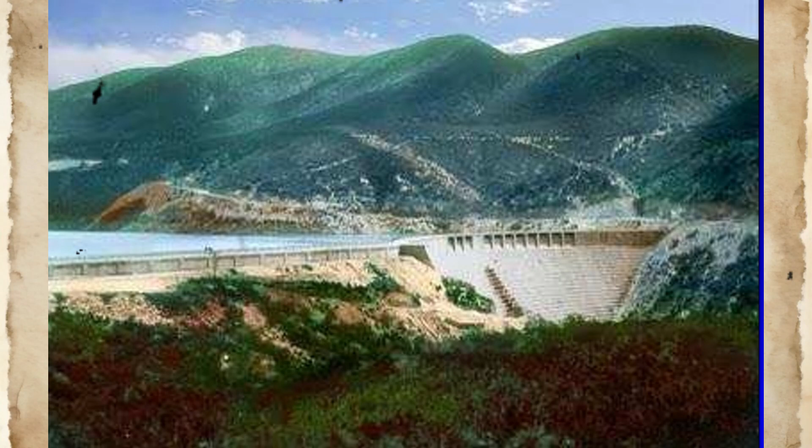The St. Francis Dam was conceived and executed within a specific institutional and technical context that shaped every subsequent decision. Between 1905 and 1913, the city of Los Angeles had constructed the Los Angeles Aqueduct, a 375-kilometer conveyance system designed to transport approximately 12 cubic meters per second of water from the Owens River drainage on the eastern slopes of the Sierra Nevada to the San Fernando Valley.

This system was designed, constructed, and administered by the Los Angeles Bureau of Waterworks and Aqueduct under the direction of William Mulholland, who served as chief engineer. Mulholland had begun his career in 1877 as a laborer maintaining water distribution canals and had risen through the organization without formal engineering education, relying instead on direct observation, technical reading, and accumulated operational experience. By 1924, Mulholland was recognized as the principal architect of Los Angeles's water infrastructure and wielded substantial autonomy in project conception, site selection, and design approval.

The St. Francis Dam was authorized as a storage facility to provide operational flexibility in the aqueduct system and to serve as a reserve supply during periods of peak demand or reduced inflow. The site selected was located in San Francisquito Canyon, a tributary valley to the Santa Clara River, approximately 64 kilometers northwest of downtown Los Angeles and 80 kilometers from the primary Van Norman Reservoir complex in the northern suburbs.

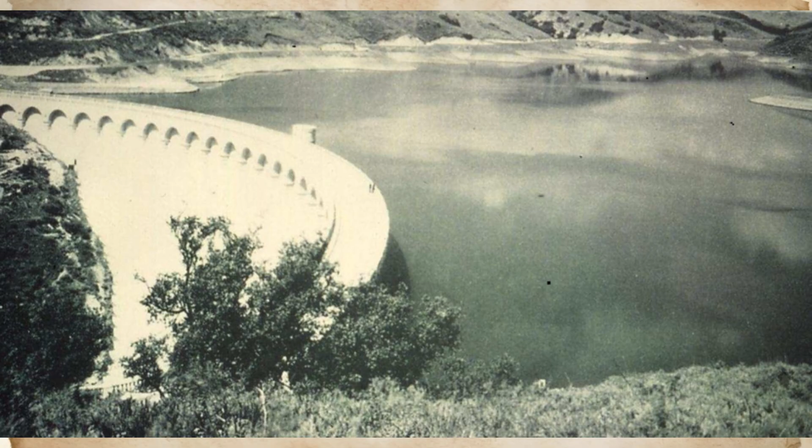Modern understanding of uplift pressure in dam foundations recognizes that hydrostatic pressure from an impounded reservoir can be transmitted through interconnected fractures, bedding planes, and cleavage surfaces in foundation rock, creating an upward force that reduces the effective weight of the dam and thereby reduces resistance to sliding and overturning.

By 1912, published literature on dam design had documented this phenomenon and had identified foundation drainage as a critical safeguard. The failure of the Austin Dam in Pennsylvania in 1911 had been attributed in part to inadequate control of uplift pressure. These precedents were apparently not incorporated into the design approach adopted for the St. Francis Dam.

The geology of the dam site was characterized by the presence of two distinct lithologic units. The western abutment and foundation consisted of the Vasquez conglomerate, a Paleogene sedimentary formation composed of poorly cemented cobbles and boulders in a matrix of clay-rich sand and silt. The eastern abutment and a portion of the central foundation consisted of the Pelona schist, a Cretaceous metamorphic rock characterized by well-developed foliation and pervasive micaceous mineralogy.

These two units were juxtaposed along the San Francisquito Fault, a northeast trending structure whose surface trace passed directly through the dam site beneath the western portion of the dam. The fault was marked by a zone of gouge and brecciated rock more than 1 meter wide, flanked by zones of intensely fractured and veined material.

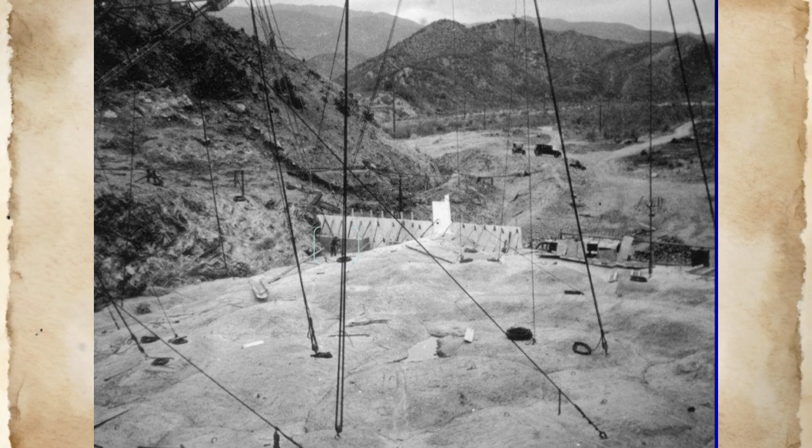The placement of a large concrete structure at the base of the slope, combined with saturation of foundation rock and introduction of hydrostatic pressure from an adjacent reservoir, constituted precisely such an alteration. The potential for reactivation of these latent slip surfaces was not evaluated prior to construction, as no detailed geological investigation of the site was conducted.

The design philosophy that guided construction of the St. Francis Dam was one of empirical precedent and conservative proportioning rather than rigorous analytical calculation. Mulholland and his design staff did not perform detailed stress analyses of the dam cross-section, load distribution on the foundation, or stability calculations incorporating realistic material properties and loading conditions.

The dam's geometry was instead based on visual similarity to the Hollywood Dam, adjusted for the greater height required at the St. Francis site. This approach was not unusual for the period, particularly for relatively small dams constructed under the authority of municipal agencies. However, it presupposed that site conditions at St. Francis would be comparable to those at Hollywood, an assumption that was not verified.

The absence of formal design calculations meant that there was no quantitative basis for assessing the adequacy of the dam's proportions, the significance of the height increase implemented during construction, or the sensitivity of stability margins to variations in foundation properties, uplift pressure, or material strength.

The institutional context in which the St. Francis Dam was designed and constructed was characterized by minimal external oversight. At the time of construction, California law exempted municipal water agencies from state-level review of dam design and construction. The Division of Water Rights, the state agency responsible for dam safety, had no jurisdiction over projects undertaken by cities

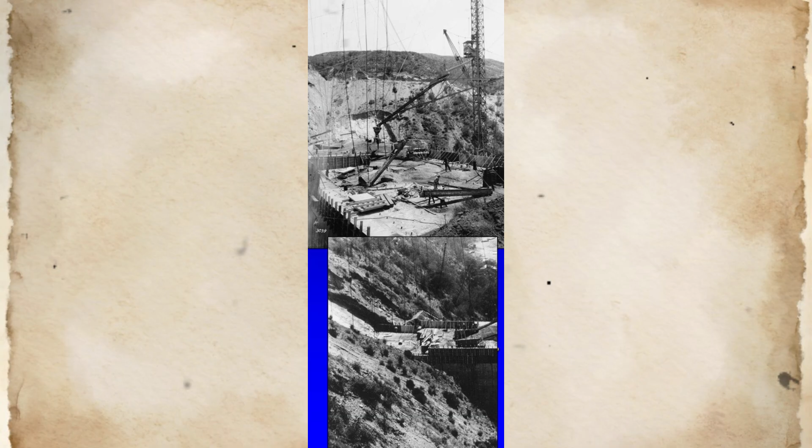or special districts. Consequently, the St. Francis Dam was not subject to independent technical review by engineers or geologists outside the Los Angeles Bureau of Water Works and Aqueduct. There was no requirement for formal design documentation, no mandate for geological investigation, and no mechanism for third-party verification of construction quality or conformance to design intent.

Mulholland's authority within the Bureau was effectively absolute. The Board of Commissioners that governed the agency consisted of appointed officials with no technical training, who deferred to Mulholland's judgment on all engineering matters. This concentration of authority in a single individual, operating without formal accountability or technical review, created conditions in which judgments based on incomplete information, untested assumptions, or personal confidence could be implemented without challenge.

The operating philosophy for the reservoir once construction was complete was similarly informal. Responsibility for monitoring the dam's condition was assigned to a resident dam keeper, whose duties included visual inspection of the structure and observation of seepage flows. No formal inspection protocol was established, no quantitative criteria were defined for evaluating observed conditions, and no escalation procedure existed for anomalies that might warrant further investigation.

The assumption was that any significant distress in the dam or foundation would manifest as visually obvious cracking, deformation, or leakage that would be self-evident to an attentive observer. This assumption rested on the expectation that the dam and foundation would behave in a predictable manner consistent with the designer's conceptual model of the structure. It did not account for the possibility that observed conditions, such as seepage flows, minor cracking, or localized settlement, might be symptomatic of progressive failure mechanisms not anticipated in that conceptual model.

Reservoir filling commenced in March 1926, when aqueduct water was first diverted into the reservoir basin. The reservoir level rose gradually as water accumulated, with interruptions corresponding to periods of reduced aqueduct flow or increased downstream demand. During this period, vertical shrinkage cracks developed in the downstream face of the dam. Such cracks are common in mass concrete gravity dams, resulting from thermal contraction as the interior of the concrete mass cools following hydration of cement.

These cracks typically extend from the exposed surface into the dam, propagating along planes of least tensile resistance. In an unreinforced monolithic structure like the St. Francis Dam, such cracks would be expected to develop along approximately radial and vertical planes in the central valley section, and along inclined radial planes in the abutment sections. The presence of these cracks was noted during routine inspections, but was not regarded as indicative of structural distress. This interpretation was consistent with contemporary understanding of mass concrete behavior and was not unreasonable given the limited information available.

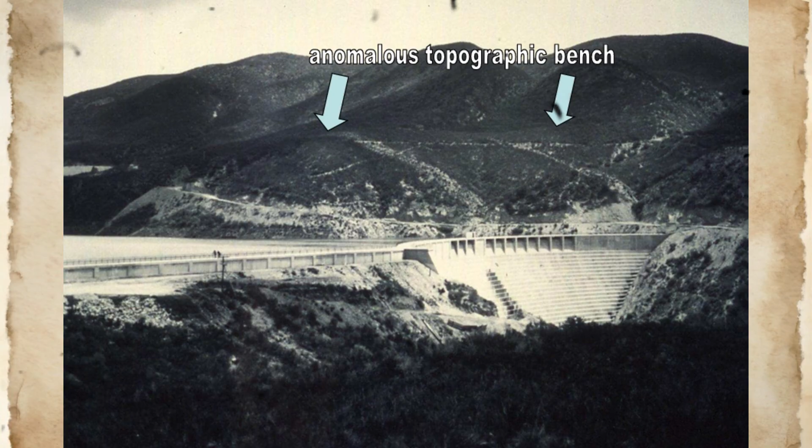By April 1926, the reservoir level had risen to the elevation of the fault trace where it crossed the foundation beneath the dam. Seepage was observed emerging from the western abutment in the vicinity of the fault outcrop. This seepage was attributed to flow through the fault gouge and adjacent fractured rock. The flow rate was estimated as modest and was judged to be within acceptable limits for a structure of this type. No corrective measures were undertaken.

Over the following months, various minor leaks were observed at different locations along the dam's downstream face and abutment contacts. These leaks exhibited variations in flow rate corresponding to changes in reservoir level and to seasonal temperature variations affecting concrete expansion and contraction.

None of the observed leakage flows were regarded as sufficiently anomalous to warrant detailed investigation or remedial action. The interpretation framework applied to these observations was one in which seepage through and beneath dams was expected, provided that flow rates remained stable and no significant erosion or piping was evident.

On March 7, 1928, the reservoir reached spillway elevation for the first time, achieving its maximum design storage capacity of approximately 38,000 acre-feet. In the week preceding this date, inspections had noted an increase in seepage flow from several locations in the western abutment. These flows were turbid, indicating that the percolating water was transporting fine-grained sediment.

Turbid seepage is a potential indicator of internal erosion or piping within the foundation or embankment material, a mechanism that can lead to progressive enlargement of seepage channels and eventual structural failure. However, in the context of the St. Francis Dam, a concrete structure founded on rock rather than an earthfill embankment, turbidity was attributed to surface erosion of weathered rock or soil materials rather than subsurface piping. This interpretation was consistent with the expectation that seepage through rock foundations would follow discrete fractures or bedding planes, rather than developing self-enlarging erosion channels as in soil.

On the morning of March 12, 1928, the dam keeper discovered a new leak in the western abutment, discharging muddy water at an estimated rate of approximately 75 liters per second. He immediately notified Mulholland, who arrived at the site later that morning accompanied by Harvey Van Norman, his assistant. They inspected the leak and observed that the flow exhibited periodic surging, a pattern of alternating higher and lower discharge rather than steady flow.

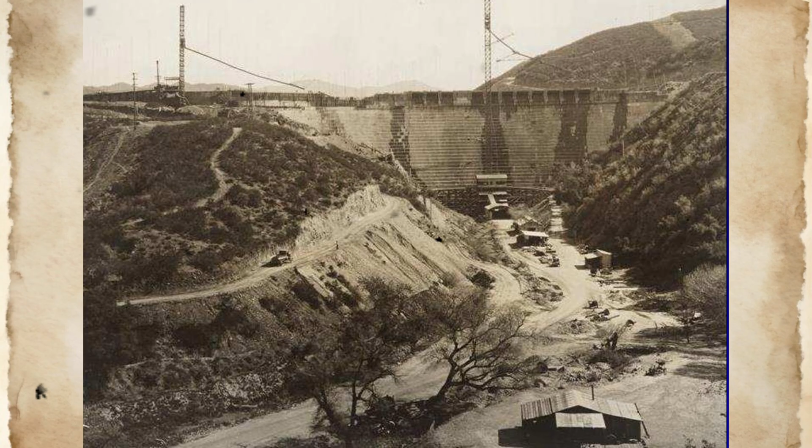The judgment rendered by Mulholland on the morning of March 12 was based on his interpretation of the observed conditions within the framework of his accumulated experience and his conceptual understanding of how the dam and foundation should behave. He had inspected numerous dams and water structures over his career and had developed intuitive criteria for distinguishing normal operational conditions from indicators of distress. The seepage flow observed on March 12, while larger and more turbid than previous flows, did not exceed the bounds of what Mulholland considered plausible for a structure of this type at full reservoir.

The surging of the flow, rather than being interpreted as evidence of subsurface erosion or structural movement, was rationalized as a transient hydraulic phenomenon. This interpretation was not implausible given the information available. However, it was predicated on the assumption that the foundation materials were behaving in a stable and predictable manner, an assumption that was, by that time, no longer valid.

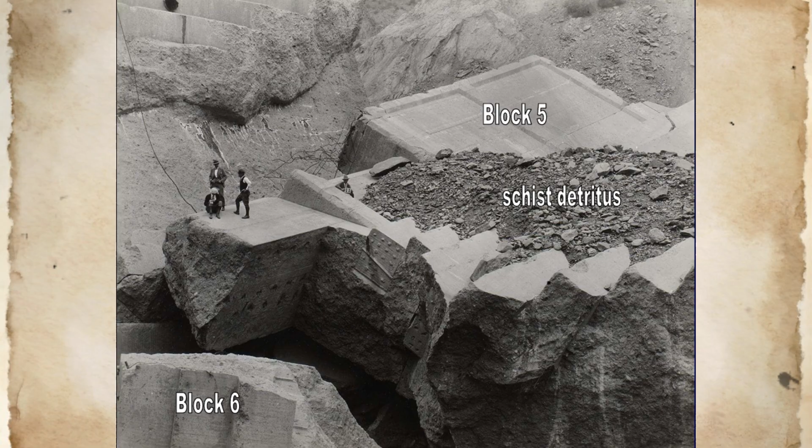At approximately 8:30 p.m. on March 12, a family driving on the canyon road that passed above the eastern abutment of the dam encountered a section of roadway that had subsided approximately 30 centimeters, creating a distinct step across the road width. The road at this location was situated approximately 30 meters upstream of the dam crest, on a slope composed of Pelona schist. The subsidence indicated that a portion of the hillside had moved downward and outward toward the reservoir. This movement was consistent with incipient landsliding along foliation planes within the schist, driven by reduced shear resistance due to elevated pore pressures in the rock mass.

The family did not immediately report the road damage, and news of the incident did not reach dam operating personnel until after the dam had failed. However, the timing of the observed subsidence, approximately 3 hours before the final collapse, indicates that large-scale deformation of the eastern abutment was already underway by early evening on March 12.

The St. Francis Dam failed at 11:57:30 p.m. on March 12, 1928. The precise timing is established by the recorded failure of an electrical transmission line supported on the eastern abutment, which caused a logged interruption at a downstream substation. Within seconds of this initial failure, the dam underwent progressive collapse in which the eastern and western wings of the structure were displaced downstream and destroyed, while a central section of the dam, subsequently termed the tombstone, remained standing. The failure released the entire reservoir volume in a period estimated at 70 minutes, generating a flood wave that propagated downstream through San Francisquito Canyon, into the Santa Clara River Valley, and ultimately to the Pacific Ocean.

The flood caused extensive destruction of infrastructure and agricultural land and resulted in at least 432 confirmed fatalities, with some estimates suggesting a higher toll. The failure of the St. Francis Dam constituted the deadliest civil engineering disaster in 20th century United States history and precipitated immediate scrutiny of the design, construction, and operational practices that had permitted such a catastrophic failure to occur.

The question that must be addressed in any forensic analysis of this failure is not merely what physical processes caused the dam to collapse, but why those processes were not anticipated, why warning signs were not interpreted correctly, and why the design and institutional framework permitted a structure of this type to be constructed and operated at this site.

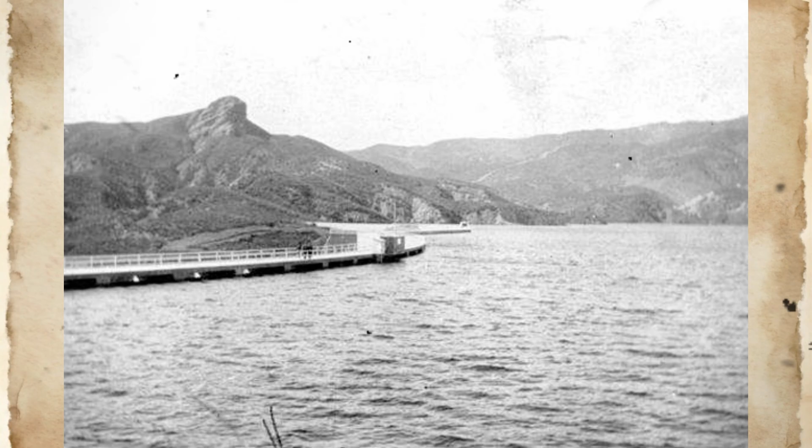Understanding these latent conditions requires examining not only the physical characteristics of the dam and its foundation, but also the cognitive frameworks, institutional norms, and professional practices that shaped how information was gathered, interpreted, and acted upon. The most fundamental latent condition was the absence of comprehensive geological investigation prior to site selection and design.

Standard practice in dam engineering, even in the 1920s, recognized that foundation geology constituted the primary determinant of site suitability, and that surface observations alone were insufficient to characterize subsurface conditions. Exploratory drilling, test pits, and detailed mapping of bedrock lithology, structure, and discontinuities were understood to be essential for evaluating bearing capacity, permeability, and potential failure modes.

However, no such investigation was conducted at the St. Francis site. The decision to construct the dam at this location was based on topographic convenience, the presence of a natural valley constriction suitable for a dam, proximity to the aqueduct alignment, and absence of existing development that would require land acquisition or relocation. Geological suitability was assessed only through visual inspection of surface exposures during site clearing operations.

This approach reflected a broader pattern in Mulholland's professional practice. His career had been built on pragmatic problem-solving and empirical judgment rather than formal analytical methods. He had successfully designed and constructed the Los Angeles Aqueduct, a project of considerable technical complexity, without formal engineering education and without reliance on outside consultants. This success reinforced a belief that direct observation, accumulated experience, and sound practical judgment were sufficient for making engineering decisions.

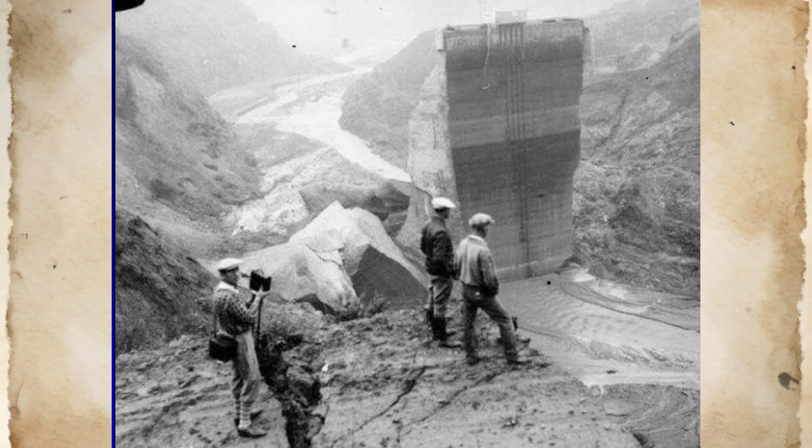A 1911 report prepared by the Bureau's own staff during route selection for the Los Angeles Aqueduct had explicitly identified the Pelona schist along the eastern wall of San Francisquito Canyon as unstable fractured material that should be avoided. This report was filed within the Bureau's records, but was apparently not consulted when the dam site was selected 13 years later. The omission is significant not because the earlier report specifically addressed the dam site, it did not, but because it demonstrates that relevant geological information existed within the organization's institutional memory and was not retrieved or applied when needed.

The presence of the San Francisquito Fault beneath the dam site was similarly documented in publicly available geological maps but was not incorporated into site evaluation. The fault had been mapped by the United States Geological Survey and was shown on regional geological compilations available prior to 1924.

Consultation of these maps during site selection would have revealed the fault's presence and should have prompted further investigation of fault zone characteristics, potential for seismic activity, and implications for foundation, permeability, and stability. However, geological maps were not routinely consulted by civil engineers in municipal water agencies during this period, particularly when those engineers lacked formal training in geology.

The conceptual framework within which Mulholland operated did not include geological structure as a primary design consideration. His focus was on topography, hydraulics, and concrete proportioning, domains in which he had extensive practical knowledge. Geology was regarded as a secondary concern, relevant primarily to the extent that obviously unsuitable materials such as loose soil or heavily weathered rock could be identified and excavated.

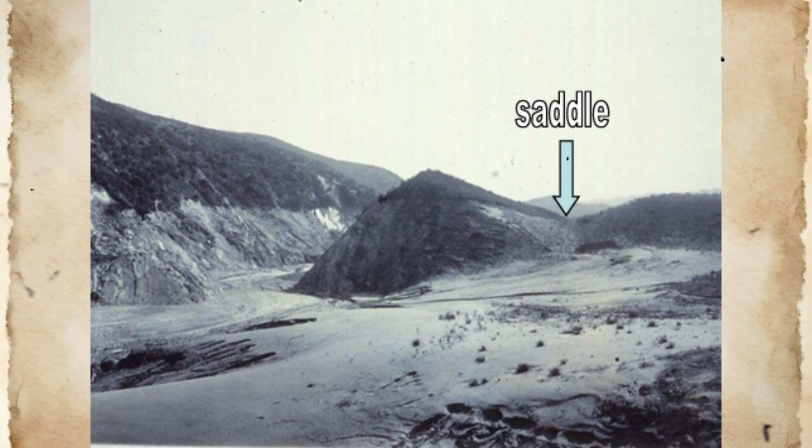The mechanical properties of the Vasquez conglomerate were such that the material could not sustain the compressive stresses imposed by the dam under reservoir loading without undergoing progressive deformation. Laboratory testing conducted after the failure established that the conglomerate's unconfined compressive strength in a saturated state was less than 2 megapascals. By comparison, the bearing stress beneath the upstream heel of the dam, where the full hydrostatic pressure of 93 meters of water head acted on the foundation, would have been approximately 1.5 megapascals in the vertical direction alone.

When the inclined components of stress, due to the dam's geometry, and the lateral thrust from arch action are included, the total stress magnitude in the foundation approached or exceeded the material's strength capacity. Progressive yielding of the conglomerate beneath the dam would produce differential settlement, with greatest deformation occurring where stresses were highest, specifically in the upper portions of the western abutment, where the dam was tallest and where the conglomerate thickness was greatest. This differential settlement would induce additional stresses in the dam structure itself.

A monolithic concrete dam founded on yielding material experiences internal tensile stresses as different portions of the structure settle by different amounts. These tensile stresses would be concentrated in regions where settlement gradients were steepest, typically at the boundaries between competent and incompetent foundation materials or at geometric discontinuities in the structure. In the case of the St. Francis Dam, such boundaries existed at the contact between conglomerate and schist near the center of the dam and at the transition between the main dam and the western wing wall.

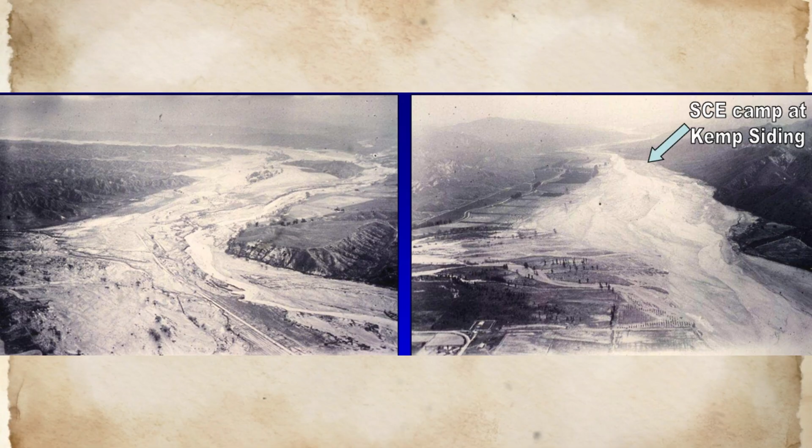In the absence of a deep cut-off wall or grout curtain to impede flow, and in the absence of relief wells or drainage galleries to dissipate pressure, the uplift pressure distribution beneath a dam may approach the full hydrostatic head of the reservoir. The mechanical consequence of uplift pressure is a reduction in the effective weight of the dam, which in turn reduces resistance to sliding and overturning. The factor of safety against sliding, defined as the ratio of resisting forces to driving forces, is directly proportional to the effective normal force acting on the foundation contact. If uplift pressure increases, the effective normal force decreases, and the factor of safety decreases correspondingly.

For the St. Francis Dam, the absence of foundation drainage beneath the eastern and western abutments meant that uplift pressure in these regions could develop to magnitudes comparable to the reservoir head. Mulholland's statement that he considered drainage unnecessary where bedrock appeared homogeneous indicates that he did not recognize the significance of uplift pressure in fractured or foliated rock masses. This judgment was inconsistent with contemporary engineering literature and with the documented experience of other dam failures attributed to uplift.

The eastern abutment presented a distinct set of latent conditions related to the orientation and mechanical properties of the Pelona schist. The schist's foliation dipped toward the canyon at angles between 30 and 50 degrees, creating planes of weakness that were approximately parallel to the slope surface.

The shear strength available along these foliation planes was controlled by friction and by the limited cohesion provided by intact rock bridges between discontinuities. Under natural conditions, with no external loading, and with groundwater levels relatively deep due to the semi-arid climate, the hillside was stable.

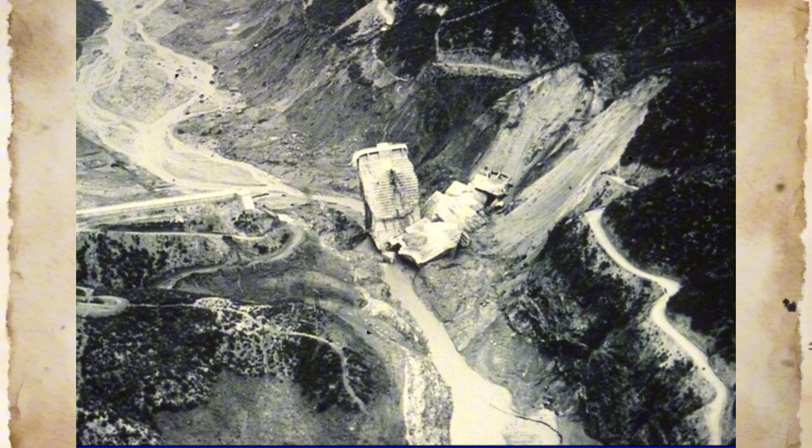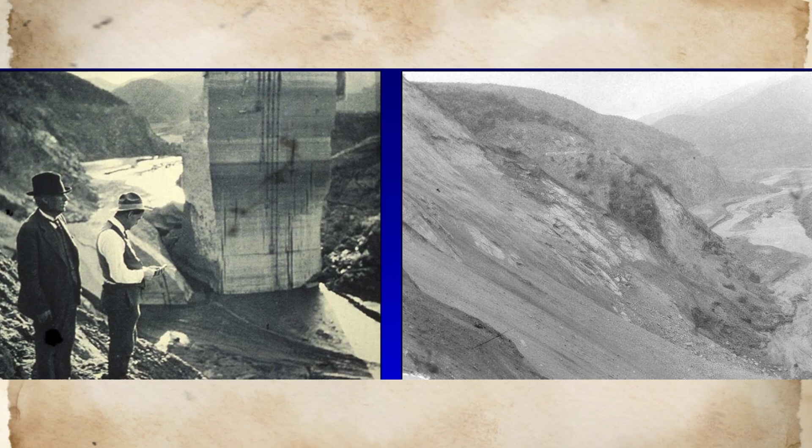The presence of these features was not unique to the St. Francis site. Similar ancient landslides were identified along much of the eastern slope of San Francisquito Canyon during post-failure reconnaissance. However, their presence at the dam site was significant because it indicated that the hillside was inherently susceptible to renewed movement if the factors controlling stability, effective stress, pore pressure, external loading were altered. The placement of a large concrete structure at the toe of the slope, combined with saturation from an adjacent reservoir, constituted precisely such an alteration.

The design of the St. Francis Dam did not incorporate any factor of safety margin to account for uncertainty in material properties, loading conditions, or construction quality. The dam's proportions were based on empirical precedent rather than analytical calculation, and no formal stability analysis was performed to verify adequacy under credible loading scenarios. This absence of quantitative analysis meant that there was no documented basis for the dam's safety margins or lack thereof.

Contemporary practice in dam engineering recognized that factors of safety should be explicitly calculated and should exceed minimum threshold values to account for uncertainties and potential deviations from design assumptions. Typical minimum factors of safety for gravity dams were 2 against sliding and 1.5 against overturning, based on assumed loading conditions that included full reservoir, uplift pressure, and earthquake forces where applicable. Whether the St. Francis Dam met these criteria could not be determined without analysis, and no such analysis was performed.

The increase in dam height implemented during construction further reduced whatever safety margins may have existed in the original design. Raising the crest by 6 meters increased the reservoir storage capacity and the hydrostatic force acting on the dam, but did not increase the dam's base width or otherwise enhance its resistance to sliding or overturning. The effect was to increase the driving forces while leaving the resisting forces unchanged, thereby decreasing the factor of safety. If the original design had been marginally adequate, the modified design would be inadequate. If the original design had included appropriate safety margins, those margins would be partially consumed by the modification.

The decision to increase the dam height without corresponding structural adjustments reflects either an implicit assumption that the original design had been highly conservative, an assumption that could not be verified without calculation, or an insufficient appreciation of how changes in geometry affect structural stability.

Photographic evidence from the construction period, analyzed after the failure, suggested that the actual extent of the dam's downstream toe may have been less than the design dimension. If the concrete pour did not extend to the intended limits, the effective base width of the dam would be reduced, further compromising stability. This discrepancy, if real, would represent a construction deficiency that should have been identified through survey and quality control procedures. However, the Bureau's construction practices during this period did not emphasize formal documentation or independent inspection.

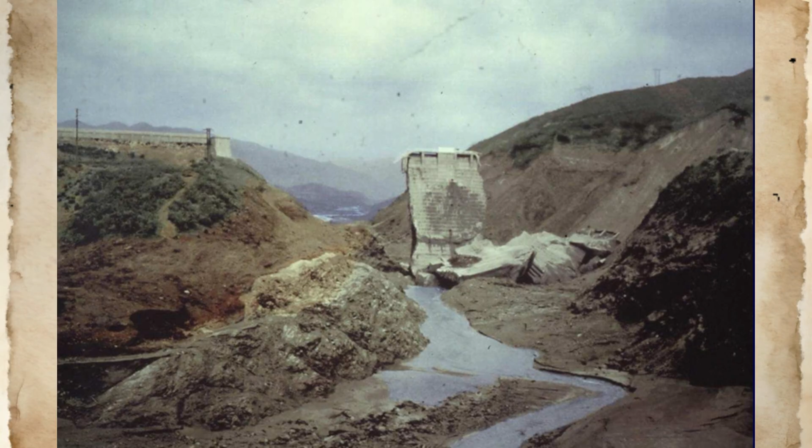Responsibility for verifying conformance to design rested primarily with the resident construction supervisor, who reported directly to Mulholland. There was no independent quality assurance function within the organization and no external oversight by state or federal agencies. Under these conditions, deviations from design could occur without detection or correction.

The dam's monolithic construction without contraction joints or other provisions for accommodating differential movement created a structural system with limited redundancy and no capacity for stress redistribution. In a jointed dam, individual blocks can move slightly relative to one another in response to foundation settlement or thermal expansion, without inducing large tensile stresses in the concrete. Joints also provide known planes of weakness that can accommodate cracking in a controlled manner. In a monolithic dam, all deformations must be absorbed by the concrete itself, and cracks develop along planes of least resistance determined by local stress concentrations, material heterogeneities, and thermal gradients.

Once formed, these cracks cannot close completely even if external loads are removed, because rough crack surfaces interlock and because some irreversible deformation occurs in the surrounding concrete. The result is a structure that, while appearing intact from external observation, consists internally of multiple blocks separated by partial or complete fractures. The mechanical behavior of such a structure under load is fundamentally different from that of a true monolith. But this difference is difficult to quantify without detailed knowledge of crack locations, orientations, and degrees of separation.

The alarm system and monitoring protocols in place at the St. Francis Dam were minimal. The dam keeper was responsible for daily visual inspection of the structure and for noting any unusual conditions such as new cracks, changes in seepage flow, or structural deformation. However, there were no instruments installed to measure concrete strain, foundation movement, seepage quantity, or uplift pressure. The dam keeper had no technical training in structural engineering or dam safety and had no formal criteria for evaluating whether observed conditions were within acceptable limits.

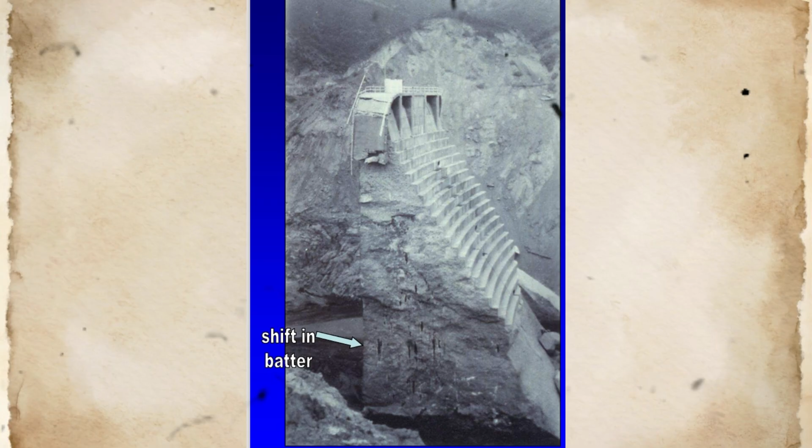This regulatory gap was not unique to California. Similar exemptions existed in other states and reflected a broader assumption that governmental agencies could be trusted to self-regulate. The St. Francis failure demonstrated the fallacy of this assumption and prompted immediate legislative changes to eliminate such exemptions.

The training and professional development of dam operators and inspection personnel during this period did not emphasize recognition of incipient failure modes or interpretation of warning signs. The dam keeper at St.

Francis had operational responsibilities but no formal education in civil engineering, structural mechanics, or dam safety. His understanding of what constituted normal versus abnormal behavior was based on informal guidance from supervisors and on his own observations over time. This knowledge was largely qualitative and comparative. A condition was judged normal if it resembled conditions previously observed, and abnormal if it represented a significant departure. However, this approach provided no framework for recognizing progressive deterioration or for distinguishing between benign variations and indicators of impending failure.

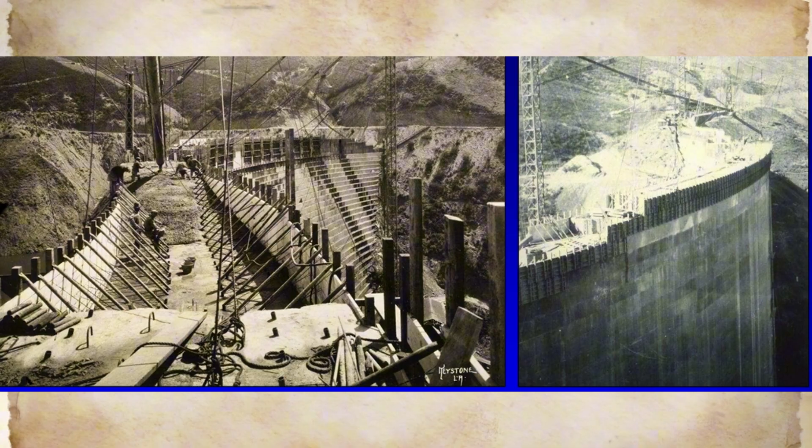The dam keeper's observation of muddy seepage and surging flow on the morning of March 12 was reported to Mulholland, but neither the dam keeper nor Mulholland interpreted these signs as indicators of imminent structural collapse. The interpretive framework available to them did not include a mental model of how subsurface erosion in weak conglomerate or progressive landslide movement in foliated schist might manifest at the surface.

The concept of progressive failure, wherein a structure or foundation gradually loses strength or stability through a sequence of incremental damage events, was not well developed in dam engineering practice of the 1920s. Failures were generally conceptualized as resulting from overload, a flood exceeding spillway capacity, an earthquake exceeding design seismic resistance, or a sudden foundation collapse due to previously undetected voids.

The possibility that a dam could fail under normal operating conditions due to gradual deterioration of foundation material or cumulative loss of structural integrity was less widely recognized. This conceptual gap meant that warning signs of progressive failure, such as increasing seepage, turbidity, or localized deformation, might be rationalized as transient anomalies rather than interpreted as evidence of an ongoing failure process.

The physical configuration of the dam site itself contributed to the latent failure conditions. The narrowness of the valley and the presence of the natural spur on the western side created a geometrically constrained site in which the dam had to accommodate significant variations in foundation elevation and material properties over a relatively short horizontal distance. The central portion of the dam rested on schist at relatively low elevation, while the western wing extended up the conglomerate slope to maintain a continuous crest.

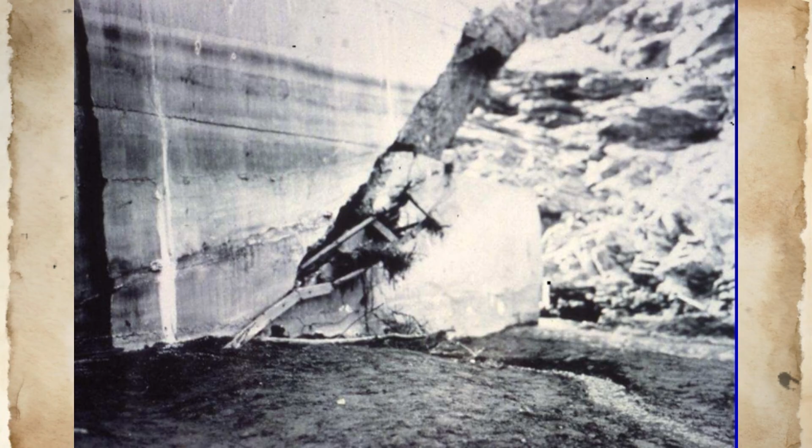The decision to construct a concrete gravity dam rather than an alternative design such as an earth or rockfill embankment reflected a preference for concrete construction that was widespread in the early 20th century. Concrete dams were perceived as more permanent, more controllable during construction, and less susceptible to erosion or piping than earthfill dams. However, concrete dams impose much higher bearing stresses on foundation materials than embankment dams of equivalent height, and they are less tolerant of foundation deformation.

An earthfill dam can accommodate moderate differential settlement through internal adjustment of the fill material, whereas a concrete dam subjected to differential settlement develops cracks and internal stress concentrations. For a site with weak or variable foundation conditions, an embankment design might have been more appropriate. The choice of a concrete gravity design presupposed that the foundation was competent and uniform, an assumption that was not verified at St. Francis.

The schedule pressures and resource constraints under which the dam was designed and constructed also constituted latent conditions. The Los Angeles water system was under continuous demand for expansion to serve the city's rapidly growing population. New storage capacity was needed urgently, and delays in project delivery were viewed as impediments to the city's economic development. This urgency created an organizational bias toward rapid decision-making and abbreviated planning processes. Comprehensive site investigation, detailed design analysis, and extended construction schedules were seen as costly and time-consuming.

The institutional incentive structure rewarded timely project completion and cost control rather than thoroughness of design or conservatism of safety margins. Under these conditions, decisions tended to favor expedience over exhaustive analysis, and judgments were made with less information than would be ideal, but with sufficient information to appear reasonable at the time.

The cumulative effect of these latent conditions was to create a socio-technical system in which failure was not inevitable in the deterministic sense, but was highly probable given the combination of weak foundation materials, inadequate design provisions, absence of external review, concentration of decision authority, and limited capacity for detecting and interpreting warning signs. No single condition was sufficient to cause failure. The conglomerate alone, or the schist alone, or the fault alone, or the inadequate drainage alone, might have been manageable if other aspects of the design and oversight system had been robust.

However, when multiple latent conditions align, when weak materials coincide with inadequate analysis, when organizational culture discourages critical review, when regulatory oversight is absent, and when warning signs are misinterpreted, the probability of catastrophic failure increases dramatically. The St. Francis Dam was a system configured for failure, awaiting only the final triggering conditions that would convert latent

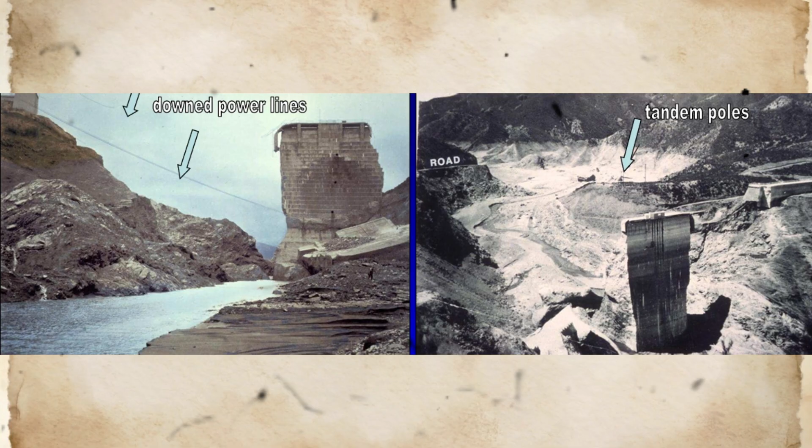vulnerability into manifest collapse. The transformation of latent vulnerability into active failure began not with a single catastrophic rupture, but through a sequence of progressive deterioration events that unfolded over days and hours preceding the final collapse. Understanding this progression requires reconstructing the state of the dam and foundation as the reservoir approached and reached its maximum designed capacity, identifying the physical processes that were initiated by full impoundment, and examining how these processes were interpreted or misinterpreted by those responsible for monitoring the structure.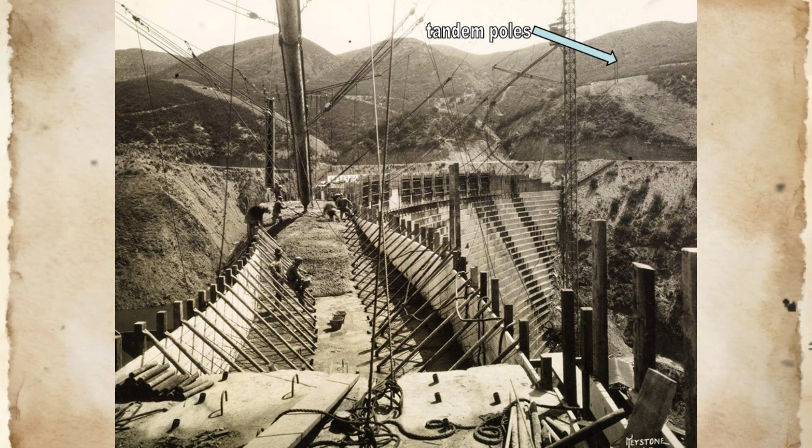The horizontal force exerted by the impounded water on the upstream face of the dam was approximately 380 meganewtons, distributed over the height of the structure according to the triangular hydrostatic pressure distribution. This force was resisted by the dam's self-weight, by shear resistance along the foundation contact, and by any arch thrust that could be developed through bearing against the abutments. The attainment of full reservoir capacity marked a transition in the hydraulic and mechanical state of the foundation. Prior to this point, water infiltration into foundation rock had been limited to elevations below the instantaneous reservoir level, with the upper portions of the abutments remaining unsaturated.

With the reservoir at spillway level, water was now in direct contact with foundation rock across the full height of the dam, and hydrostatic pressure was being transmitted into fractures, bedding planes, and foliation surfaces throughout the foundation volume. The rate at which pore pressures within the foundation equilibrated with reservoir pressure depended on the permeability of the rock mass and on the connectivity of flow paths. For highly fractured or foliated rock with interconnected discontinuities, equilibration could occur within hours to days. For less permeable rock with isolated fractures, equilibration might require weeks to months.

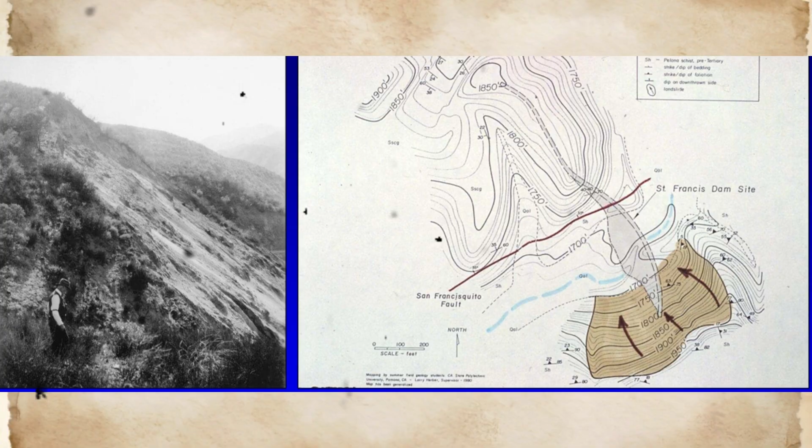The Pelona schist forming the eastern abutment and portion of the central foundation possessed moderate permeability along foliation planes and cross-cutting fractures, but low permeability across intact rock matrix. The foliation orientation dipping into the hillside at 30 to 50 degrees provided preferential flow paths that were approximately parallel to the slope surface. Water entering these foliation planes from the reservoir would migrate along the planes into the hillside, creating elevated pore pressures at depth. The magnitude of pore pressure at any given point would depend on the hydraulic gradient between that point and the reservoir, and on the resistance to flow along the intervening path.

In regions where foliation planes were continuous and open, pore pressures could approach the full hydrostatic head corresponding to the elevation difference between the reservoir surface and the point of interest. In regions where flow paths were constricted or discontinuous, pore pressures would be lower. The mechanical consequence of elevated pore pressure within the schist was a reduction in effective normal stress acting across foliation planes and other potential sliding surfaces. Effective stress, defined as total stress minus pore pressure, controls the frictional resistance available to resist shearing. As pore pressure increases, effective stress decreases, and shear strength decreases proportionally.

For a hillside that was marginally stable under natural conditions, the introduction of elevated pore pressures due to reservoir filling could reduce the factor of safety below unity, initiating slope movement. This movement would not necessarily be instantaneous or catastrophic. It could occur as slow creep or as episodic incremental displacements, particularly if the sliding mass encountered irregularities or intact rock bridges along the slip surface that temporarily arrested motion.

Evidence of such movement was documented on the evening of March 12 when the Silve family encountered the broken roadway on the eastern abutment. The road's subsidence of approximately 30 centimeters indicated downward and outward displacement of a block of hillside schist. The location of this displacement, approximately 30 meters upstream of the dam crest, suggests that the sliding mass extended from near the reservoir shoreline down to the base of the dam or below.

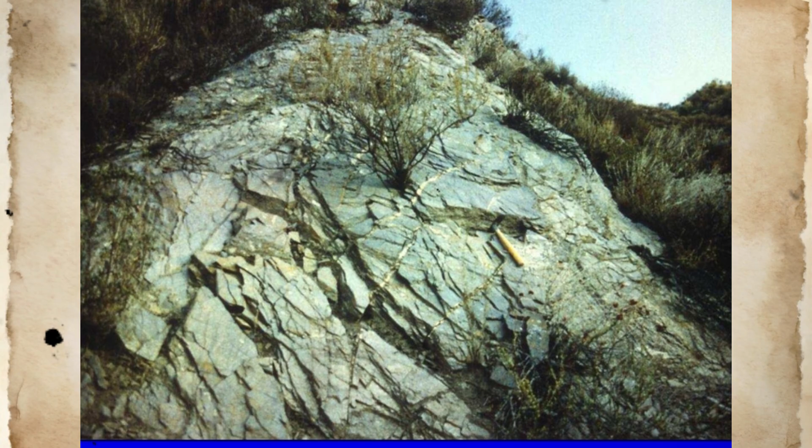The timing of the observed displacement, approximately 3 hours before the final collapse, indicates that large-scale deformation of the eastern abutment was actively underway by early evening on March 12. However, because this observation was not reported to dam operating personnel until after the failure had occurred, it did not influence real-time decision-making.

The Sespe conglomerate forming the western abutment and foundation exhibited very different behavior under reservoir loading. The conglomerate's clay-rich matrix absorbed water readily, leading to swelling and progressive loss of strength. Gypsum veins within the conglomerate dissolved upon prolonged contact with percolating water, creating enlarged seepage paths and reducing the material's cohesion. The combined effects of saturation, swelling, and dissolution resulted in a gradual reduction in bearing capacity and an increase in deformability. Under the compressive stresses imposed by the dam, the saturated conglomerate underwent creep, time-dependent deformation at constant stress, and localized compression where stress concentrations were highest.

Seepage through the conglomerate had been observed from early in the reservoir filling process. Initial seepage flows were clear, indicating that water was moving through existing voids or fractures without mobilizing fine particles. As saturation progressed and the conglomerate matrix began to soften, seepage flows became turbid, indicating that fine-grained material was being transported in suspension. Turbidity in seepage is a recognized warning sign in dam safety because it indicates internal erosion, the progressive removal of material from within the structure or foundation.

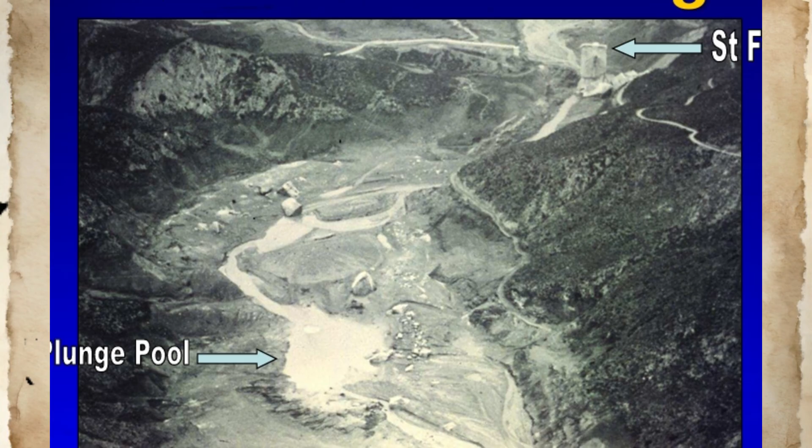If internal erosion continues unchecked, it can create enlarged flow channels that further accelerate erosion, eventually producing cavities or pipes that undermine structural support. However, the significance of turbidity depends on the context. In an earthfill embankment dam, turbid seepage is an immediate concern because it indicates active piping in the dam body or foundation. In a concrete dam founded on rock, turbidity was more commonly attributed to surface erosion of weathered rock or mobilization of sediment from pockets of loose material exposed during excavation.

During the week preceding March 12, multiple seepage flows were observed in the western abutment, several of which exhibited turbidity. These flows were reported to Mulholland and Van Norman, who inspected the dam on several occasions. Their interpretation was that the turbid water was likely draining from superficial materials or from seams of weathered conglomerate exposed on the downstream slope.

This interpretation was consistent with the expectation that the conglomerate, while weak, was not undergoing catastrophic internal erosion. It was also consistent with the broader assumption that the foundation, having been exposed during site clearing and visually inspected prior to concrete placement, was adequate to support the dam under design loading. The possibility that subsurface erosion was actively enlarging flow paths within the conglomerate, and that this process was progressively weakening the foundation, was not considered as a likely mechanism.

On the morning of March 12, the dam keeper discovered a new leak emerging from the western abutment. This leak was larger than previously observed seepage flows and was discharging visibly muddy water. The estimated flow rate of 75 liters per second, if accurate, represented a significant volume of seepage and implied the existence of a well-developed subsurface flow path with relatively high permeability. More concerning was the periodic surging of the flow, alternating periods of higher and lower discharge rather than steady flow.

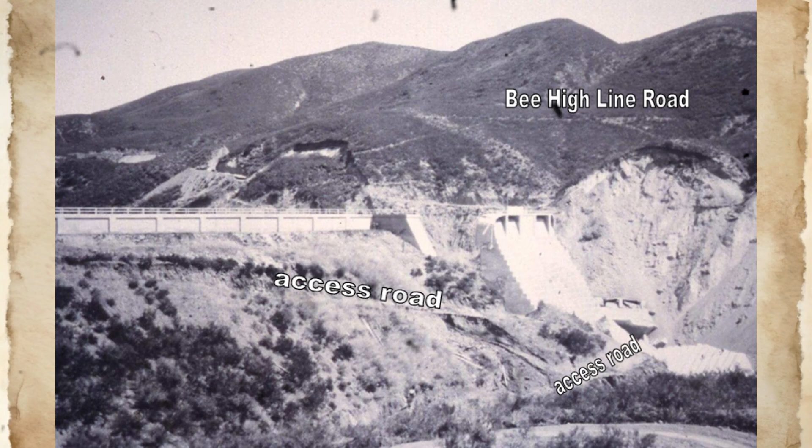The decision not to take immediate action in response to the March 12 observations, specifically, the decision not to lower the reservoir level as a precautionary measure, reflected a judgment that the risk of imminent failure was low. Lowering the reservoir would have required releasing water through the outlet works, reducing storage available for downstream delivery, and potentially creating operational difficulties if the reservoir could not be refilled promptly. These considerations were weighed against the perceived urgency of the observed conditions.

In Mulholland's assessment, the conditions warranted monitoring and future remedial work, but did not justify immediate emergency drawdown. This judgment was communicated to the dam keeper, who was instructed to continue normal operations and to report any further changes. Between noon on March 12 and the time of final collapse at approximately midnight, the physical processes that had been underway in the foundation continued and accelerated.

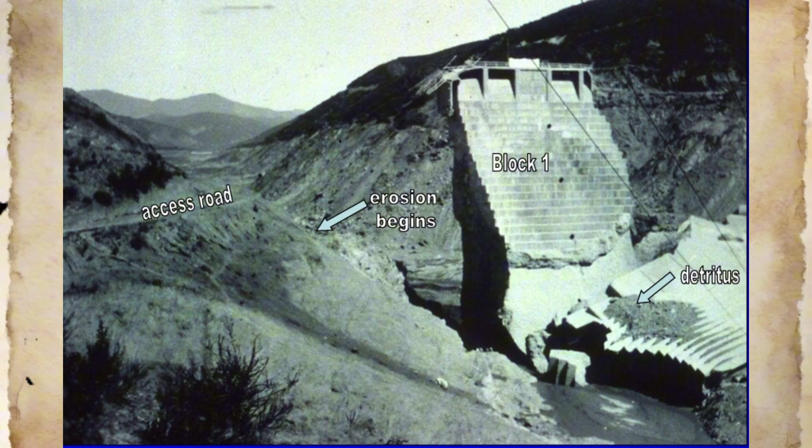Subsurface erosion within the conglomerate continued to enlarge flow paths and to remove support from beneath the western portion of the dam. Pore pressures within the schist of the eastern abutment continued to reduce effective stresses along foliation planes, bringing the hillside closer to or beyond the threshold of stability. The weight of the dam and the hydrostatic pressure of the reservoir continued to impose stresses on foundation materials that were progressively losing strength. At some point during this period, the balance of forces transitioned from a marginally stable configuration to an actively unstable configuration in which failure became inevitable.

The precise sequence of events during the hours immediately preceding collapse cannot be reconstructed with certainty because no witnesses observed the dam continuously during this period, and no instrumentation recorded the progression of failure. However, physical evidence examined after the failure, combined with analysis of failure mechanics, allows reconstruction of the probable sequence. The eastern abutment, already experiencing progressive landslide movement as evidenced by the road subsidence observed at 11:30 p.m., continued to deform under the combined effects of reduced shear resistance along foliation planes and increased loading from the reservoir.

This deformation may have been accelerating as the slope approached or exceeded the critical state for kinematic instability. Simultaneously, the western abutment was experiencing progressive yielding of the saturated conglomerate foundation, where the dam was tallest and the conglomerate thickness was greatest. Bearing stresses exceeded the material's saturated compressive strength, producing incremental settlement.

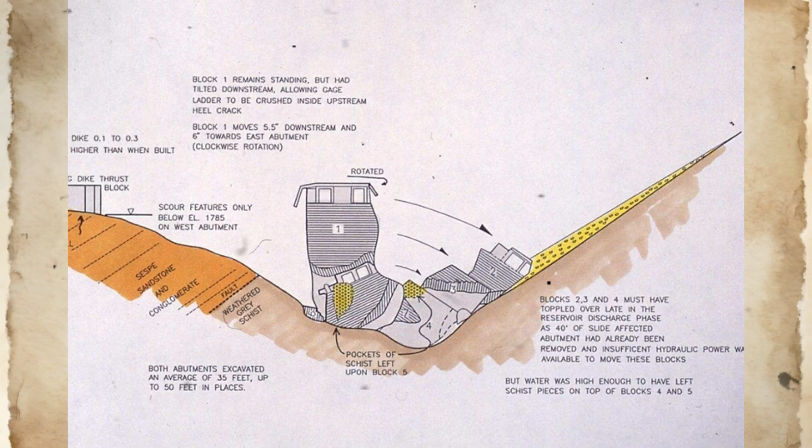This settlement was not uniform, but was concentrated in zones where the conglomerate was weakest, or where stress concentrations were highest. Differential settlement between adjacent portions of the dam would have induced tensile stresses in the concrete, potentially propagating existing shrinkage cracks or opening new fractures. As the integrity of the dam structure was progressively compromised by cracking, its ability to distribute loads and to resist

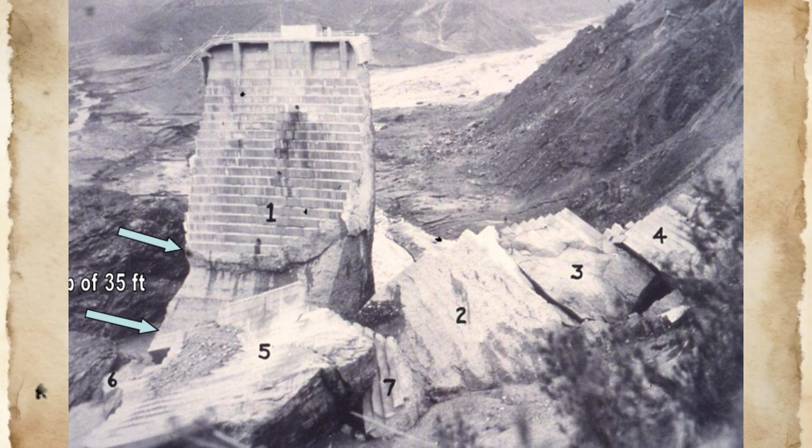deformation decreased. The interaction between these two deteriorating conditions, progressive landslide movement on the east and progressive foundation yielding on the west, created a mechanically coupled system in which deformation in one location altered stress distributions in adjacent regions. As the eastern abutment moved outward and downward, support was removed from the eastern portion of the dam.

The dam structure, no longer fully restrained on the eastern side, experienced increased cantilever deflection and increased arch thrust toward the western abutment. This increased thrust, transmitted through the already cracked concrete, imposed additional loading on the western foundation, accelerating yielding and settlement. The result was a positive feedback loop. Deformation begat additional stress redistribution, which begat additional deformation.

At approximately 11:57:30 p.m. on March 12, this deterioration process reached a critical threshold. The precise trigger for final collapse, whether it was catastrophic failure of the eastern abutment landslide, sudden rupture of the dam structure along a major crack, or a combination of mechanisms, cannot be determined definitively. However, the evidence indicates that failure initiated in the eastern abutment.

The electrical transmission line supported on the eastern hillside above the dam failed at 11:57:30 p.m., as recorded by instrumentation at a downstream substation. This timing corresponds to the moment of initial major structural displacement. The failure of the transmission line indicates that the hillside was undergoing large-scale rapid movement, either as acceleration of the existing slow landslide or as sudden catastrophic collapse of the slope.

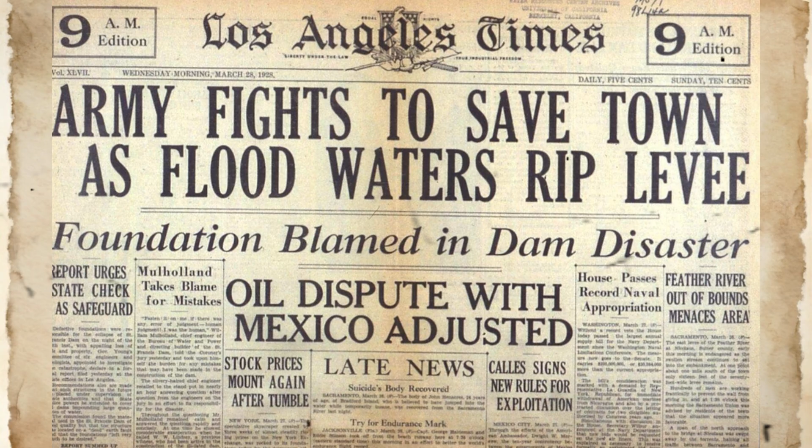The removal of support from the eastern end of the dam by the landslide would have immediately destabilized the eastern wing of the dam structure. The concrete blocks forming this section, no longer restrained by the adjacent hillside and subjected to full hydrostatic pressure from the reservoir, would have been thrust outward and downstream.

The loss of the eastern wing would have created a breach in the dam, allowing reservoir water to begin flowing out at high velocity. This outflow would have rapidly eroded the landslide debris and exposed foundation material at the base of the breach. However, the outflow at this stage would have been limited to the width of the breach and would have been constricted by the remaining central and western portions of the dam.

The central portion of the dam, the section that ultimately survived as the tombstone, was founded on schist at a lower elevation than the abutment sections and was provided with foundation drainage in the form of relief wells. This drainage, while limited, was apparently sufficient to control uplift pressures beneath this section to a degree adequate to maintain stability. However, the sudden removal of lateral support from the eastern side, combined with the dynamic loading from the initial outflow, subjected the tombstone section to forces for which it had not been designed.

Survey measurements conducted after the failure determined that the top of the tombstone had moved approximately 15 centimeters in a radial direction and a similar distance in an easterly tangential direction. These displacements indicate that the tombstone experienced both rotation and lateral translation during the failure sequence, but retained sufficient structural integrity and foundation support to avoid complete collapse.

The western portion of the dam, founded on saturated and weakened conglomerate, was subjected to altered stress conditions as the eastern wing failed and the central section moved. The removal of confining stress from the eastern side combined with the increased hydrodynamic forces from the accelerating outflow exceeded the remaining capacity of the western section to resist downstream displacement. Approximately 20 minutes after the initial failure of the eastern wing, based on analysis of flood wave timing and reservoir drainage rates, the western wing of the dam collapsed.

This secondary collapse was likely triggered by a combination of mechanisms: increased downstream thrust from the partial breach flow, loss of confining stress from the now displaced central section, and final loss of bearing support as the saturated conglomerate yielded under increased loading. The collapse of the western wing created a second major breach, allowing reservoir water to discharge through both the eastern and western openings simultaneously.

The combined outflow capacity through these breaches was enormous, estimated at peak rates exceeding 500,000 cubic feet per second, equivalent to approximately 14,000 cubic meters per second. This flow rate is comparable to the peak discharge of the Mississippi River during major floods and far exceeds the outflow capacity of the dam's outlet works or spillway.

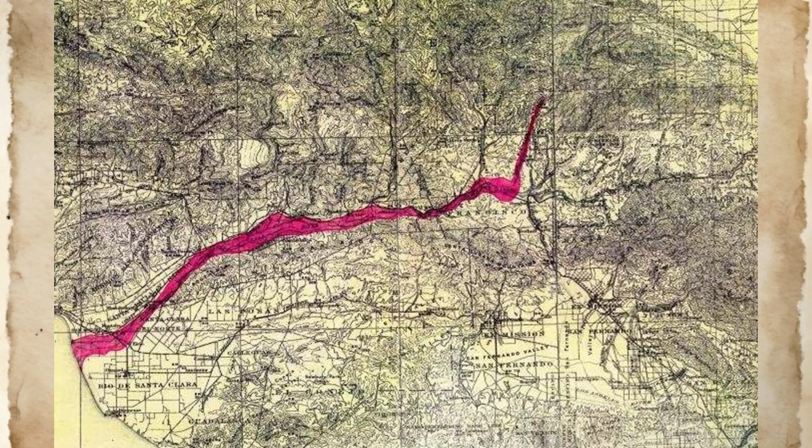The reservoir level dropped rapidly as this outflow continued, falling at rates exceeding 1 meter per minute during the peak discharge period. Within approximately 70 minutes of the initial failure, the reservoir had drained almost completely, leaving only residual pools in low-lying areas of the former reservoir basin.

The flood wave generated by this sudden release of water propagated downstream through San Francisquito Canyon at velocities estimated at 25 to 30 kilometers per hour. The wave height in the narrow upper canyon reached approximately 40 meters, measured from pre-flood ground surface to the peak water surface elevation indicated by scour marks and debris deposition on canyon walls.

As the wave advanced downstream and the valley widened, wave height decreased and wave width increased, with a total volume of water spreading laterally across the available floodplain. Witnesses in the town of Castaic, located approximately 8 kilometers downstream of the dam, reported hearing a rumbling sound beginning at approximately 12:45 a.m. on March 13th, followed shortly by the arrival of the flood wave, which destroyed most structures in the town.

Telephone warnings were successfully transmitted to communities further downstream, including Fillmore and Santa Paula, allowing many residents to evacuate to high ground before the flood wave arrived. In Fillmore, the wave arrived at approximately 3 a.m., and in Santa Paula at approximately 3:20 a.m. By this time, the wave had attenuated considerably due to spreading and energy dissipation, but it was still sufficient to cause extensive destruction of structures and infrastructure in the low-lying areas adjacent to the Santa Clara River.

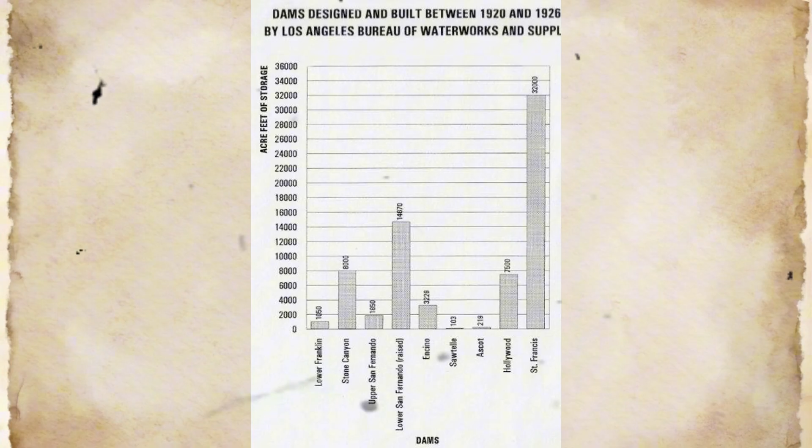The flood wave reached the Pacific Ocean at approximately 5:30 a.m., some 5 hours after the initial dam failure, by which time it had spread across several kilometers of width and had diminished to a depth of a few meters. The human toll of the St. Francis Dam failure was catastrophic.

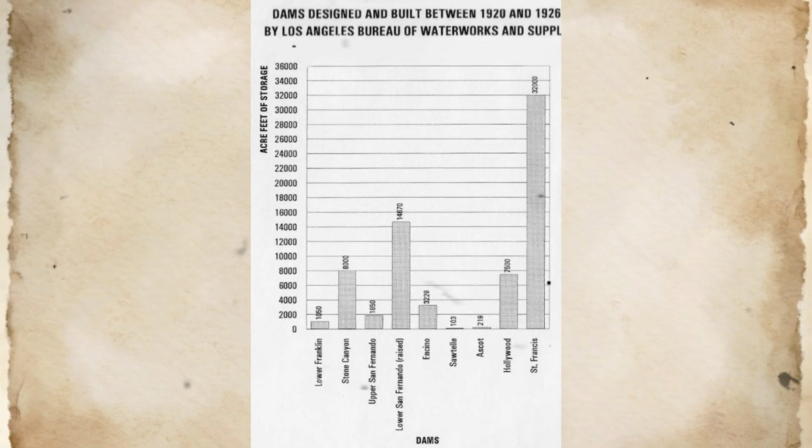The coroner's official count identified 432 confirmed fatalities, but this number was recognized as incomplete because some bodies were never recovered, having been swept out to sea or buried under debris. Demographic analysis and missing person reports suggested that the actual death toll may have exceeded 450. The majority of fatalities occurred in the upper reaches of San Francisquito Canyon and in isolated ranches and work camps in the Santa Clara Valley, where residents received no warning and had no opportunity to escape.

In the towns of Fillmore and Santa Paula, where telephone warnings allowed partial evacuation, casualties were substantially lower but still significant, particularly among those who did not hear the warnings or who were unable to reach high ground in time. The material damage extended over more than 87 kilometers of valley length from the dam site to the ocean.

Approximately 1,200 structures were destroyed, including houses, barns, agricultural buildings, and industrial facilities. Thousands of hectares of agricultural land were scoured or buried under debris. Multiple bridges, sections of highway and railroad infrastructure were destroyed.

The economic cost, estimated at the time as approximately $15 million in 1928 currency, corresponded to several hundred million dollars in present value. However, the economic impact extended beyond direct property damage to include lost agricultural production, costs of emergency response and recovery, and long-term disruption to regional development.

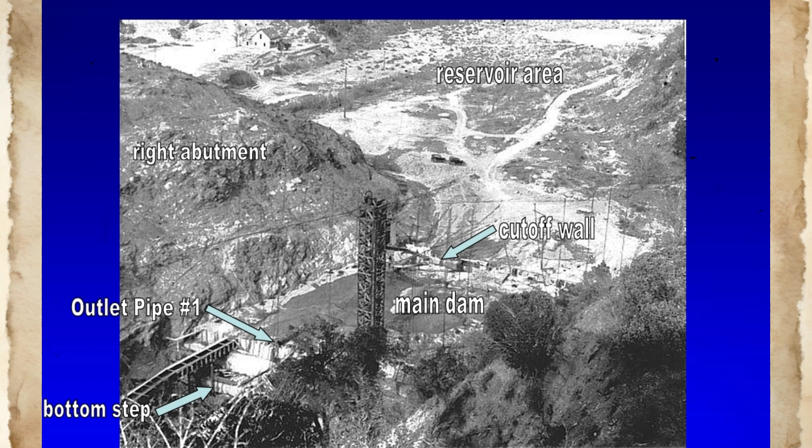A design process that included thorough geological investigation and rigorous stability analysis would have identified the unsuitability of the site or would have resulted in design modifications to address the identified hazards. An organizational culture that encouraged questioning of assumptions and solicitation of external expertise would have created opportunities for alternative interpretations to be considered. An institutional framework that required independent review would have provided a mechanism for identifying deficiencies before construction proceeded. Each of these safeguards was absent at St. Francis, and their collective absence made the failure probable.

The collapse of the St. Francis Dam was not a singular catastrophic event, but rather the terminal phase of a multi-mechanism failure chain in which distinct physical processes interacted, reinforced one another, and ultimately converged to produce total structural failure. Reconstructing this failure chain requires integrating evidence from post-failure site inspections, analysis of the final positions and conditions of dam fragments, examination of foundation surfaces exposed after the flood, laboratory testing of foundation materials, and application of mechanical principles governing dam stability, rock mass behavior, and progressive failure. The objective is to establish a causally complete sequence, to identify each critical link in the chain, to explain how one condition enabled or accelerated the next, and to define the point beyond which recovery was no longer possible.

The failure chain began not on March 12, but weeks earlier, when the reservoir first approached full capacity and water began to saturate foundation materials that had remained unsaturated throughout most of the filling period. The Sespe conglomerate forming the western abutment and foundation was exposed to sustained wetting for the first time, as the reservoir level rose to spillway elevation. The conglomerate's response to saturation was governed by its mineralogical composition and microstructure. The matrix consisted predominantly of clay minerals, primarily montmorillonite and illite, with minor proportions of quartz, feldspar, and calcite.

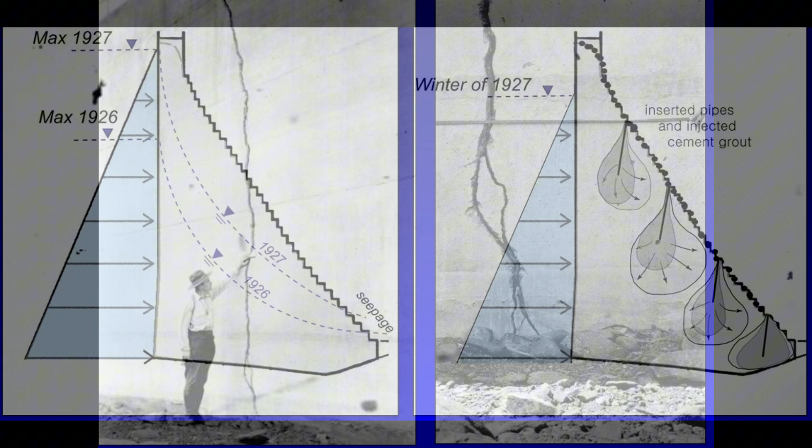For the St. Francis Dam, the differential settlement beneath the western abutment would have induced tensile stresses in the upstream face of the dam in this region, promoting crack propagation from the water face into the interior of the structure. These cracks, once formed, provided pathways for reservoir water to penetrate into the dam. Water pressure within cracks exerts a wedging force that tends to open the cracks further, a phenomenon known as hydraulic fracturing. The progression is self-reinforcing. Settlement causes cracking. Cracking allows water penetration, water pressure widens cracks, and widened cracks facilitate additional settlement by reducing the effective area resisting load.

Simultaneously with the mechanical degradation of the conglomerate, chemical dissolution of gypsum veins was occurring within the foundation. Gypsum, calcium sulfate dihydrate, has a solubility in water of approximately 2.5 grams per liter at typical groundwater temperatures. This solubility is low compared to highly soluble salts such as halite, but it is sufficient to produce measurable dissolution over timescales of days to weeks when flowing water is in continuous contact with gypsum surfaces. The gypsum veins in the Vasquez conglomerate ranged in thickness from a few millimeters to 2 centimeters and were distributed throughout the formation. As seepage water migrated through the conglomerate, it dissolved gypsum from vein walls, widening the veins and creating interconnected cavities along former vein networks.

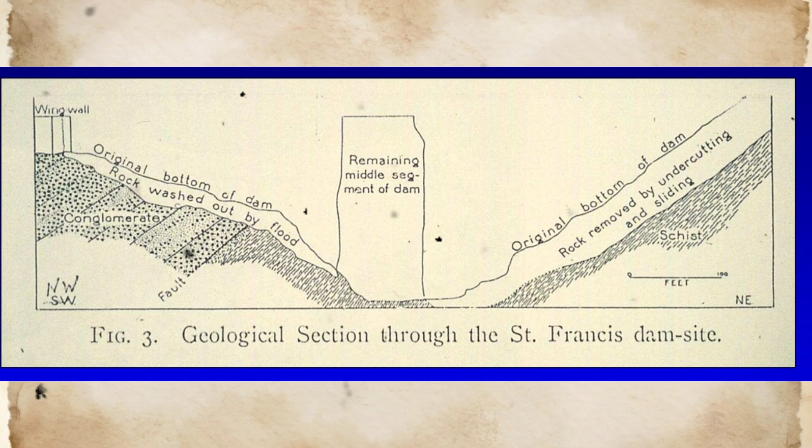The mechanical effect of piping within the conglomerate was a progressive reduction in the effective volume of foundation material supporting the dam. As cavities enlarged, the load previously carried by the material removed was transferred to adjacent intact material, increasing stress concentrations and accelerating deformation. In the limiting case, a sufficiently large cavity or interconnected system of cavities could undermine the foundation entirely, leaving portions of the dam base unsupported. Physical evidence suggests that this condition was approached, if not reached, in localized areas beneath the western wing of the dam prior to final collapse. Fragments of the western wing recovered after the failure exhibited zones of concrete that had been in contact with open voids, indicated by clean, unscarred surfaces with no adhering foundation material.

On the eastern side of the dam, a different set of physical processes was producing foundation instability. The Pelona schist forming the eastern abutment responded to reservoir filling primarily through changes in pore pressure along foliation planes rather than through bulk material degradation, as in the conglomerate. The foliation in the schist consisted of parallel surfaces defined by aligned mica crystals, separated by distances ranging from a few millimeters to several centimeters. These surfaces were inherently weak in shear due to the low friction coefficient of mica minerals, and due to the absence of significant cohesion or interlocking across the smooth foliation planes.

Under dry conditions and with no external loading, the hillside schist was stable because gravitational stresses acting parallel to foliation were less than the available frictional resistance. The impoundment of the reservoir altered this stability balance through two mechanisms. First, the weight of the dam applied a vertical load to the base of the slope, increasing the shear stress acting on potential slip surfaces extending into the hillside. Second, infiltration of reservoir water into foliation planes elevated pore pressures, reducing effective normal stress and thereby reducing frictional resistance.

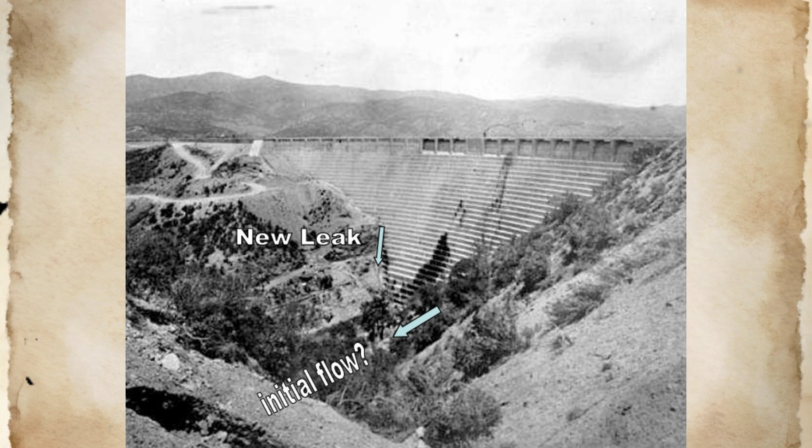The catastrophic phase of failure was initiated by the eastern abutment landslide reaching a critical state of acceleration. Landslides on foliation planes in schist typically exhibit a characteristic failure progression: initial slow creep, followed by accelerating movement as resisting forces are progressively overcome, culminating in rapid runout once a threshold velocity is exceeded and dynamic effects begin to dominate. The transition from slow creep to rapid acceleration can occur over minutes to hours and may be triggered by a specific event such as failure of an intact rock bridge along the slip surface, or a sudden increase in pore pressure due to opening of a previously closed fracture.

For the eastern abutment at St. Francis, this transition occurred at approximately 11:57 p.m. on March 12, as evidenced by the failure of the electrical transmission line at that moment. The rapid movement of the landslide mass subjected the eastern wing of the dam to forces that exceeded its structural capacity within seconds. The concrete blocks forming the eastern wing, already weakened by shrinkage cracks and potentially by tensile fractures induced by earlier slow movements, were thrust downstream and outward.

Eyewitness testimony from Ace Hopewell, who was passing near the dam site at the time of failure, described hearing a deep rumbling sound beginning at approximately 11:57 p.m. This sound was consistent with the fracturing of large concrete blocks and the grinding of concrete fragments against rock surfaces as the eastern wing disintegrated. The breakup of the eastern wing created multiple large fragments, the largest of which, weighing several thousand tons, were carried downstream by the initial surge of water from the breached reservoir.

The tombstone section was founded on schist, but at a lower elevation than the eastern wing, and the foliation orientation beneath the tombstone dipped more steeply into the foundation rather than parallel to the slope surface. This geometry provided greater resistance to sliding than the orientation beneath the eastern wing. Additionally, the tombstone was the only section of the dam provided with foundation drainage in the form of relief wells. These wells, while modest in number and capacity, apparently provided sufficient pressure relief to limit uplift pressures beneath this section to levels that maintained an adequate factor of safety against sliding. The structural integrity of the tombstone concrete, potentially less compromised by shrinkage cracks than the wings, also contributed to its survival.

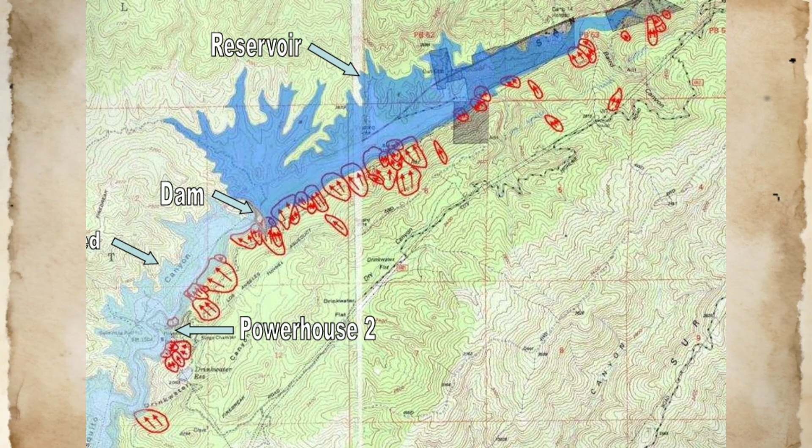The combination of favorable foundation geometry, limited drainage, and structural integrity was sufficient to prevent collapse of this section despite the extreme loading conditions imposed during the progressive failure of the adjacent wings.

The western wing of the dam failed approximately 20 minutes after the eastern wing, based on analysis of floodwave propagation timing and reservoir drawdown rates. This time interval corresponds to the period required for reservoir level to drop sufficiently that hydrodynamic forces on the western wing changed from the static hydrostatic pressure distribution to a dynamic distribution dominated by drawdown-induced pressures.

As water discharged through the eastern breach, the reservoir level adjacent to the western wing dropped rapidly, creating a vertical pressure gradient on the upstream face. This gradient induced additional downstream thrust on the structure. Simultaneously, the partial drainage of the reservoir reduced the confining pressure on the saturated conglomerate foundation, allowing it to expand

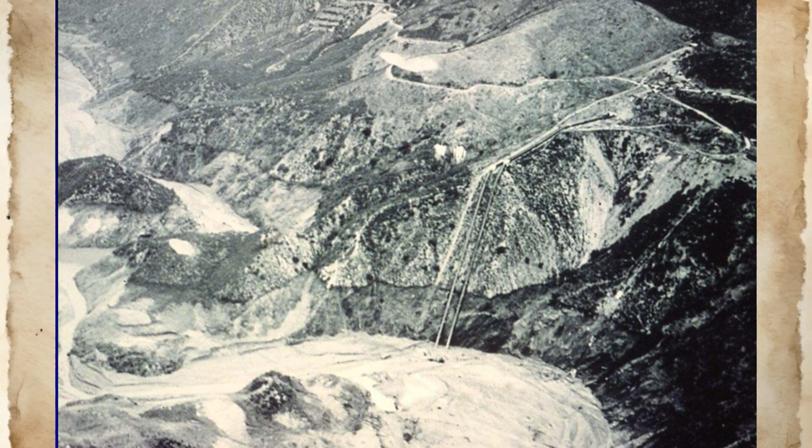The collapse of the western wing created a second major breach approximately 80 meters wide, allowing the remaining reservoir water to discharge through both the eastern and western openings simultaneously. The combined outflow through these two breaches reached peak rates estimated at 14,000 to 16,000 cubic meters per second, flow rates that drained the reservoir to near-empty conditions in approximately 70 minutes from the initial failure.

The erosion of foundation material during the flood discharge was extensive. In the western abutment, approximately 6 meters of conglomerate was removed over an area of several thousand square meters, exposing the underlying schist and fault zone. In the eastern abutment, landslide debris and weathered schist were scoured to depths of 10 to 15 meters, creating a channel substantially below the original valley floor elevation.

The erosive action was concentrated in the first 30 to 40 minutes of discharge, when flow velocities were highest and when the flow was heavily laden with sediment that enhanced its abrasive capacity. As the reservoir level dropped and flow rates decreased, erosion rates diminished correspondingly. By the time the reservoir was nearly empty, erosion had essentially ceased, leaving a stable channel geometry that was documented in post-failure surveys.

The first awareness that a catastrophic failure had occurred came from residents and travelers in San Francisquito Canyon, who heard the initial collapse or who encountered the rapidly advancing flood wave. Ace Hopewell, whose motorcycle journey brought him past the dam site at approximately midnight, heard a deep rumbling noise that he initially attributed to blasting operations at a nearby construction site. Within minutes, he encountered floodwaters on the canyon road and narrowly escaped to higher ground. His subsequent report to authorities provided one of the earliest confirmations that a major disaster was underway.

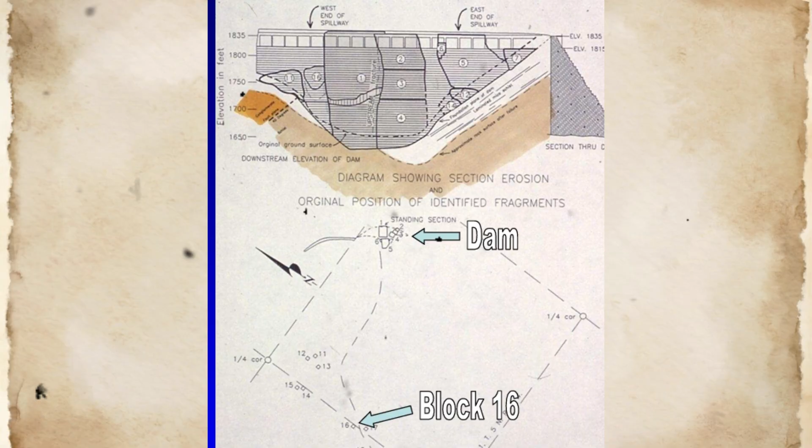Similarly, the power company substation downstream of the dam recorded the failure of electrical transmission lines at 11:57:30 p.m., providing an objective timestamp for the initial structural failure. However, the significance of this electrical fault was not immediately recognized by power company personnel, who initially interpreted it as a routine equipment failure rather than as an indicator of dam collapse.

The first confirmed communication of the dam failure to municipal authorities occurred at approximately 12:30 a.m. on March 13, when a telephone call reached the Los Angeles Bureau of Waterworks and Supply offices reporting that the dam had collapsed and that flood waters were moving down the Santa Clara Valley. This report prompted immediate efforts to warn downstream communities. Telephone operators in Los Angeles began placing calls to police departments, fire departments, and other emergency services in towns along the anticipated flood path. The effectiveness of these warnings varied considerably depending on the time available before flood arrival, the adequacy of local communication infrastructure, and the ability of local authorities to alert residents and facilitate evacuation.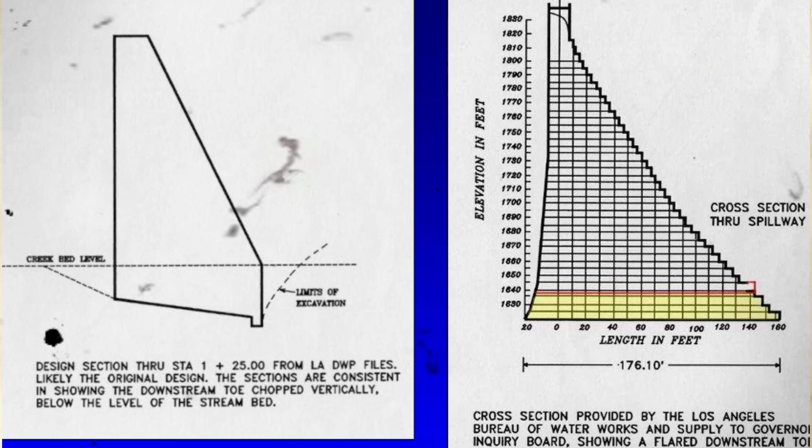The process of identifying recovered bodies was complicated by the violence of the flood, which in many cases caused severe trauma that made visual identification impossible. Dental records, personal effects, and witness testimony were used to establish identities where possible.

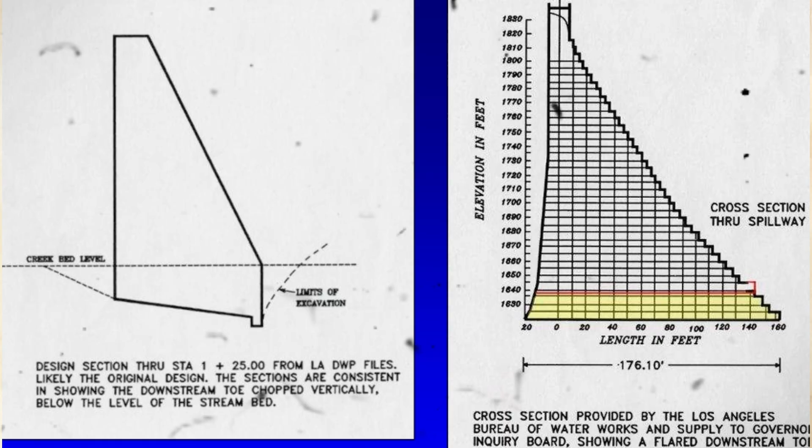The engineering response to the disaster involved multiple parallel investigations conducted by different organizations and jurisdictions. The Los Angeles County coroner convened a formal inquest to determine the cause of death for identified victims and to assess legal responsibility for the disaster. The coroner's jury heard testimony from witnesses, reviewed physical evidence, and received expert opinions from engineers and geologists.

The California governor appointed a commission consisting of civil engineers and geologists to investigate the technical causes of the failure and to make recommendations for preventing similar disasters. The Los Angeles Bureau of Water Works and Supply conducted its own internal investigation. Professional engineering societies, including the American Society of Civil Engineers, assembled independent review panels to examine the failure and to disseminate lessons learned to the broader engineering community.

These multiple concurrent investigations produced overlapping but not always consistent findings, reflecting differences in methodology, access to evidence, and interpretive frameworks. The physical evidence available for forensic analysis consisted of the damaged and partially destroyed dam structure, the scoured foundation surfaces exposed after the flood, displaced blocks of concrete distributed along the canyon, and material samples that could be collected for laboratory testing.

Access to the site was complicated initially by residual flooding, unstable debris piles, and ongoing search and rescue operations. Systematic engineering surveys of the site did not begin until several days after the failure, by which time some evidence had been disturbed by rescue activities and by natural weathering. Nevertheless, the investigation teams were able to document key features, including the final position and orientation of the tombstone section, the locations and dimensions of the eastern and western breaches, the extent of foundation scour, the positions of major displaced concrete blocks, and the characteristics of exposed foundation rock.

If foundation drainage had been provided beneath the full length of the dam, uplift pressures would have been controlled, and factors of safety against sliding would have been higher. If independent technical review by a state agency or external consultants had been required, any of these deficiencies might have been identified and corrected. The absence of these safeguards meant that prevention of failure would have required recognition of the problem and initiation of corrective action during the operational phase specifically.

During the period of reservoir filling when the effects of foundation saturation and increased loading were becoming manifest, the observed increases in seepage, the development of turbidity, and the surging flow pattern on March 12 were symptomatic of progressive failure, but these symptoms were ambiguous and could be rationalized within a conceptual framework that did not include subsurface erosion in rock foundations or landslide reactivation as credible mechanisms. A more conservative interpretation of these warning signs would have prompted reservoir drawdown as a precautionary measure, but such conservatism was not part of the operational culture or the decision-making framework in place at the time.

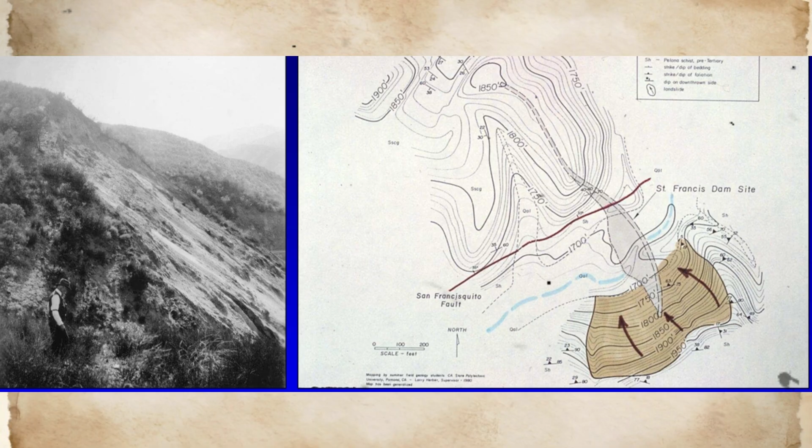The institutional response to the disaster included immediate changes to California's dam safety regulatory framework. Within weeks of the failure, the state legislature began consideration of amendments to eliminate the exemption that had allowed municipal agencies to construct dams without state review. The legislation that ultimately passed in 1929 gave the California Division of Water Resources authority to review and approve all dam designs regardless of ownership, to inspect dams during construction, and to require modifications to existing dams found to be unsafe. This legislation established one of the first comprehensive state-level dam safety programs in the United States and served as a model for similar programs adopted in other states in subsequent years.

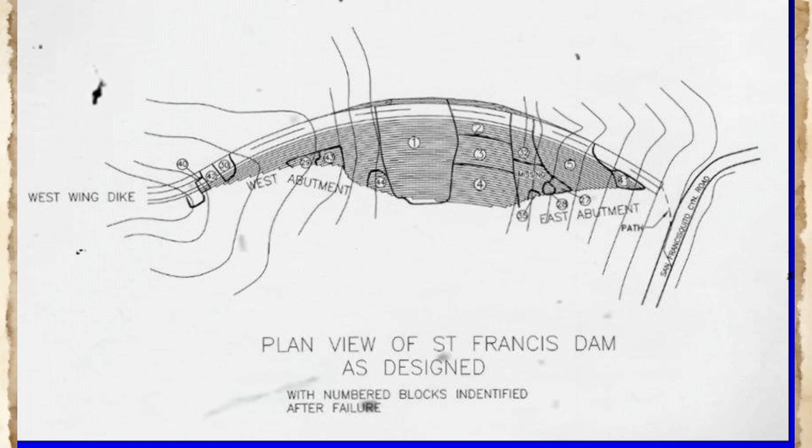Professional engineering practice was also affected by the disaster. The failure prompted increased emphasis on geological site investigation as a mandatory component of dam design. Engineering curricula began to include more extensive treatment of foundation mechanics, soil and rock behavior, and the importance of subsurface exploration. Professional societies developed and disseminated guidelines for dam design that emphasized the need for formal calculations of stability, consideration of uplift pressure, provision of drainage, and inclusion of appropriate factors of safety. The concept of independent technical review, whereby significant projects are subjected to examination by engineers not affiliated with the design team, gained wider acceptance as a means of identifying potential errors or oversights before construction.

The human dimension of the post-failure period was profound and extended far beyond the immediate casualties and property losses. Survivors who had lost family members, homes, or livelihoods faced lengthy processes of recovery and rebuilding. The psychological trauma of the disaster affected not only direct survivors but also rescue workers, investigators, and community members who witnessed the destruction. William Mulholland, who had built his professional reputation on the successful delivery of water infrastructure to Los Angeles, was personally devastated by the failure.

He testified at the coroner's inquest, accepting full responsibility for the disaster and stating that no blame should attach to any other person. He resigned from his position at the Bureau shortly afterward and lived in relative seclusion until his death in 1935. His legacy remains complex. He is remembered both as the visionary engineer who made possible the growth of Los Angeles through the construction of the aqueduct system, and as the engineer whose errors led to one of the deadliest civil engineering disasters in American history.

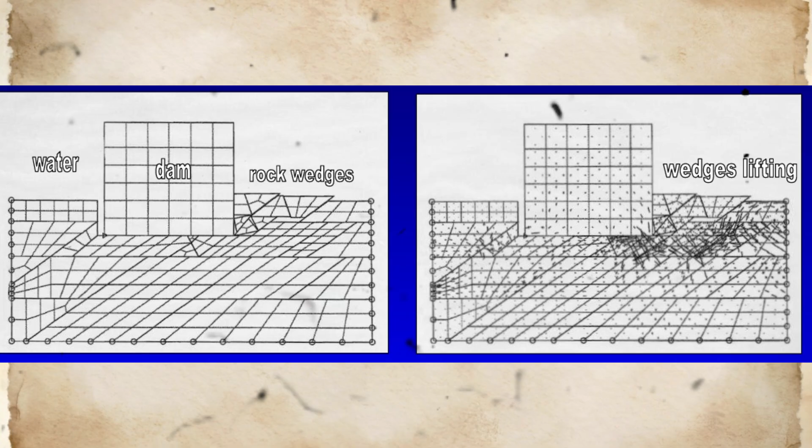The forensic investigations collectively identified multiple contributing factors, but did not reach unanimous agreement on the relative importance of different factors or on the precise sequence of events. The California Governor's Commission concluded that the failure was due primarily to defects in the foundation, specifically citing the weakness of the conglomerate and the presence of ancient landslides in the schist. The coroner's jury reached a similar conclusion, but added that there had been an error in engineering judgment in the design and construction of the dam.

Professional engineering panels emphasized the absence of adequate foundation investigation, the inadequacy of drainage provisions, and the failure to perform rigorous stability calculations. All investigations agreed that the disaster was preventable, and that it resulted from a combination of geological unsuitability of the site and engineering deficiencies in design and construction.

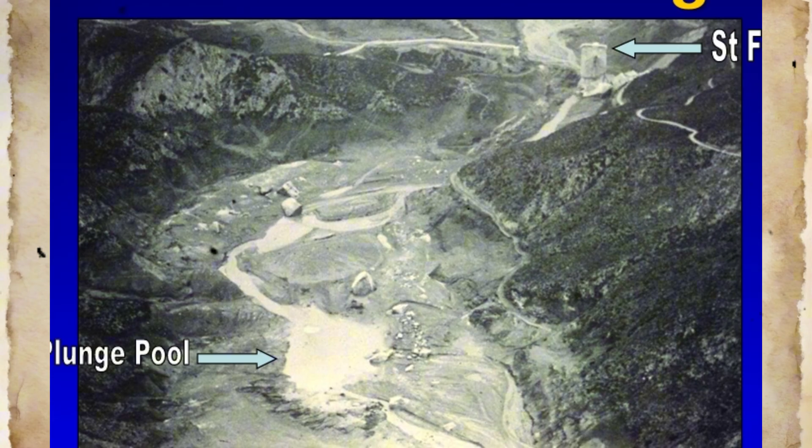One of the persistent uncertainties that remained after the investigations was the question of whether the dam could have survived if only one of the two abutment problems, the conglomerate weakness or the schist instability, had been present without the other. This counterfactual analysis is inherently speculative, but is relevant to understanding which failure mechanism was most critical. If the eastern abutment had been stable, would the progressive yielding of the conglomerate foundation alone have caused collapse, or would the dam have simply settled and deformed without total failure? If the conglomerate had been competent, would the eastern abutment landslide alone have caused collapse?

The evidence suggests that either condition alone might have been manageable, particularly if adequate drainage had been provided to control uplift pressures. However, the combination of both conditions, along with the absence of drainage, the inadequate structural proportions, and the monolithic construction without joints, created a configuration in which failure was highly probable and ultimately inevitable.

The secondary crisis of assessing the safety of other existing dams and water structures in California and nationwide was addressed through systematic inspection programs initiated by state and federal agencies in the years following the St. Francis failure. These inspections identified numerous dams with deficiencies similar to those at St. Francis: inadequate foundation investigation, insufficient drainage, lack of formal stability calculations, and absence of independent review.

The economic costs of the disaster extended beyond the direct property damage and loss of life. The city of Los Angeles faced claims for damages totaling many millions of dollars, filed by survivors and by the estates of deceased victims. The legal proceedings extended over several years and ultimately resulted in settlements totaling approximately $15 million in 1928 currency, equivalent to several hundred million dollars in present value. The financial burden was borne by Los Angeles taxpayers through bond issues and rate increases.

The reputational damage to the city and to the Los Angeles Bureau of Waterworks and Aqueduct was significant and long-lasting, affecting public confidence in municipal water infrastructure and in the competence of public agencies to manage large-scale engineering projects. The St. Francis Dam site itself was not redeveloped as a dam location. The surviving fragments of the dam, the tombstone section and portions of the western wing wall, were demolished in 1929 to remove hazards and to prevent their presence from serving as a memorial to the disaster.

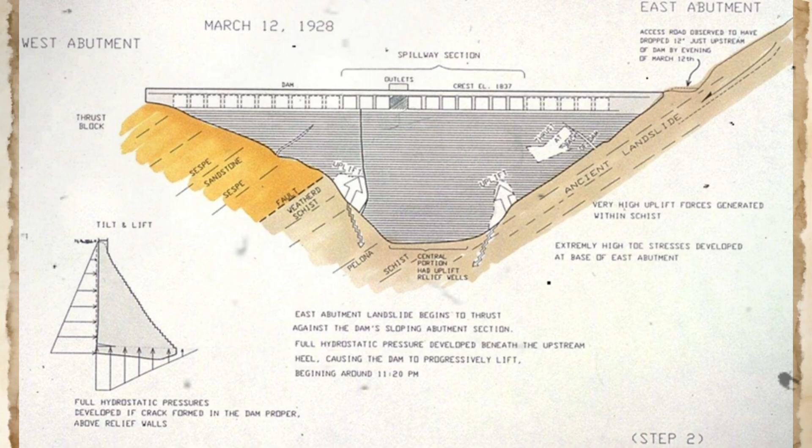The reservoir basin reverted to natural drainage, and the area remained largely undeveloped for decades. In subsequent years, the site has been recognized as historically significant, and efforts have been made to preserve the remaining evidence of the dam and to interpret the disaster for educational purposes. The location is now accessible to visitors and serves as a sobering reminder of the consequences of engineering failure.

The question of what could be known in the immediate aftermath of the failure versus what could only be determined through extended forensic investigation is central to understanding the stabilization and recovery period. In the first hours after collapse, observers could see that the dam had failed catastrophically, that both abutments had been involved, and that the reservoir had drained completely.

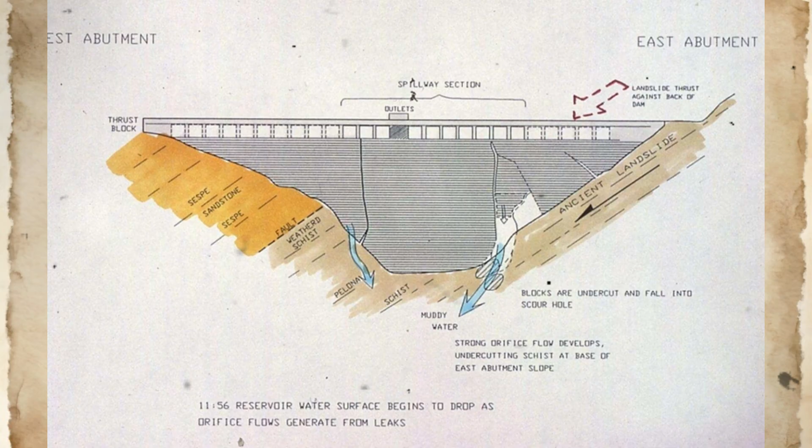They could not determine the sequence of failure, the specific mechanisms that had initiated collapse, or the relative contributions of different factors. These determinations required systematic investigation, geological mapping of the abutments, laboratory testing of foundation materials, structural analysis of the dam proportions, and reconstruction of the sequence based on physical evidence and witness testimony. The investigations took months to complete, and their conclusions were debated for years afterward, reflecting the inherent difficulty of reconstructing complex failure sequences from post-event evidence.